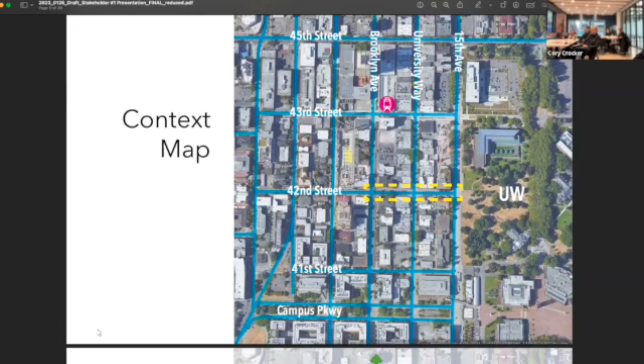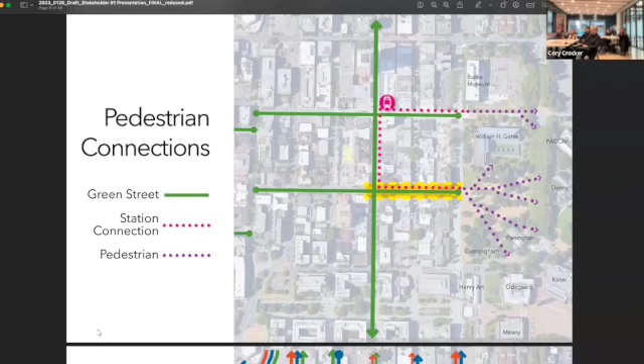This slide is highlighting the importance of this pedestrian connection to the Ave, or to the campus. This is the friendliest and nicest pedestrian connection off of 15th Ave getting onto UW campus, and we also have a close connection to the new light rail station.

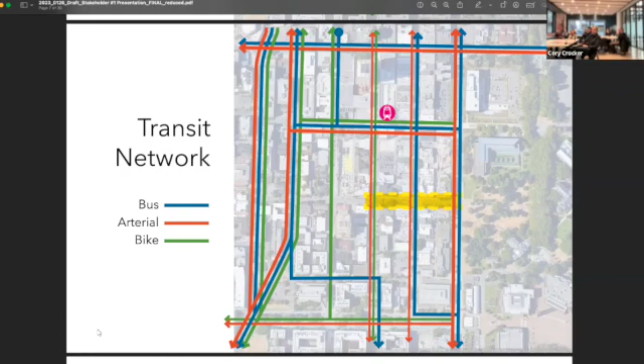This is looking at where buses, bikes, and cars are going. These red lines are the arterial streets, and this highlights that this is one of the few places in our neighborhood.

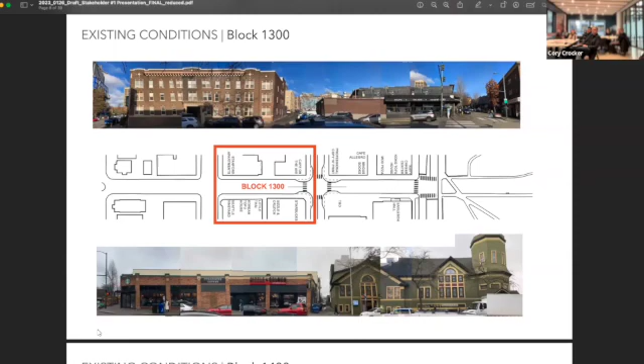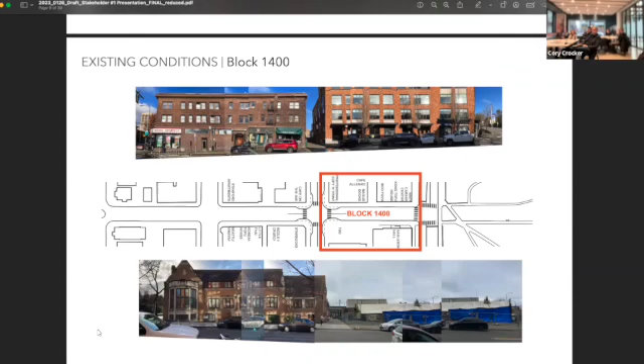This is the facade along 42nd Street. We're going to look at the 1300 block and then move on to the 1400 block. The thing I wanted to notice here is the variety of uses and buildings: residential, lots of ground floor retail, a church. Then on the next you'll see a new building, old historic buildings, and what will probably be a new building as well right here.

Empty lot. So now we're going to zoom in a little closer to the street and look at some of the conditions right on 42nd. This is just to highlight that it's currently a project looking to install curb bulbs right at the intersection of 42nd and the Ave. So just keep that in mind as we're thinking about what the future of this looks like.

Kevin used a little lingo there, curb bulb. So we're extending, you see the dash line on there, and that's what's on the drawing on your tables. By the way, the packets have the same information you're seeing, so you can cruise through there and recall something Kevin has shared with you. A bulb is, you're extending the curb to create a shorter crossing for pedestrians, calm traffic, creating a better pedestrian condition by calming the vehicles down.

This is being proposed by a project kitty corner to our project, the church that came down, and its new apartment building going up. Joshua knows a little bit about the history there. It's on the books right now, at about 90% design. It's our opportunity to inform that design, if we can even at least acknowledge that it's there and something to work with. That's what's shown on the drawing, so ask us at the table going forward. It's not a platform, they're just curb extensions, still a curb and gutter situation. That's a good example of something that could be tabled, and we can go through that later.

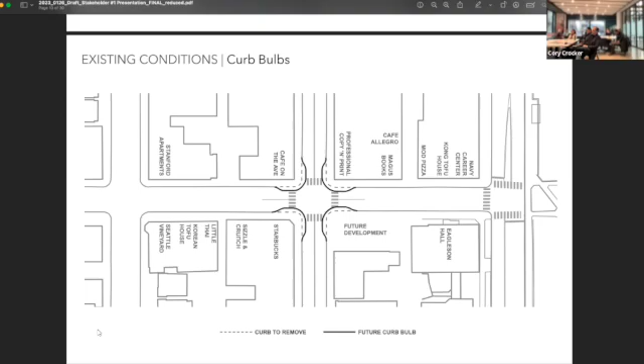This is looking at the buses and vehicles more on a granular level, highlighting the street but also that there's vehicular traffic in the alleys here. And then where are the buses? Buses here are coming down the Ave.

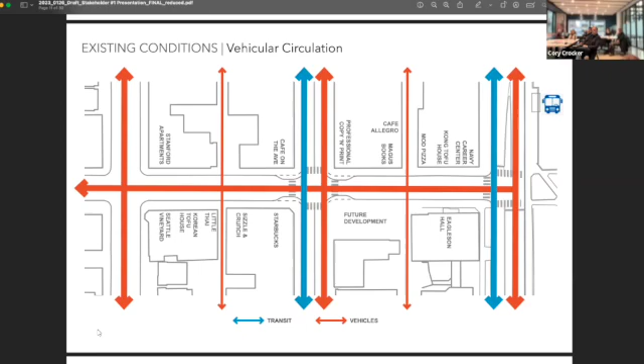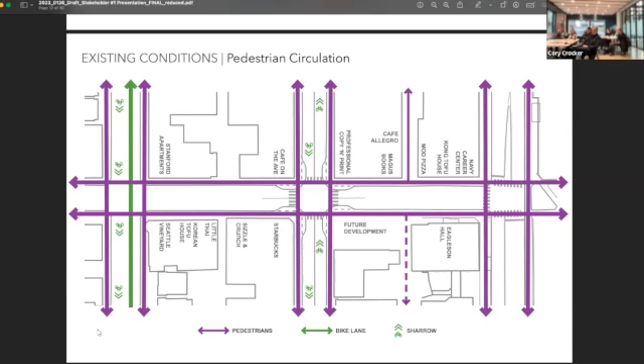We're looking at pedestrian and bike circulation. There's a lot of this east-west connection on the campus, but then also the Ave right here, and of course throughout the neighborhood.

So let's be very clear about what the needs are from a business owner, from the community, how it's balanced with other uses of the street. Just be conscious of that when we get into that conversation. Be very specific about it, don't globally say parking, because parking is a number of things. It's how we assign curb space, which Joshua would know a lot about. The city does, there's a full-time person that assigns curb space. So we can expect that to be a good conversation, a meaningful one today.

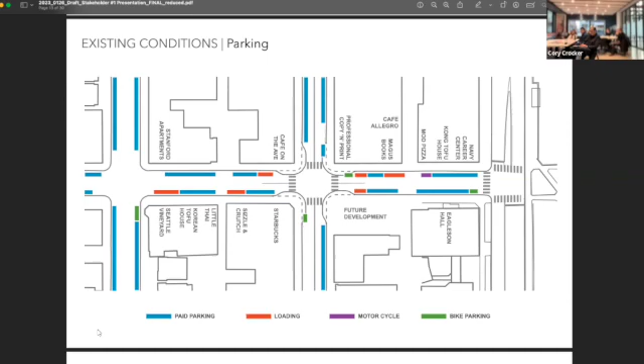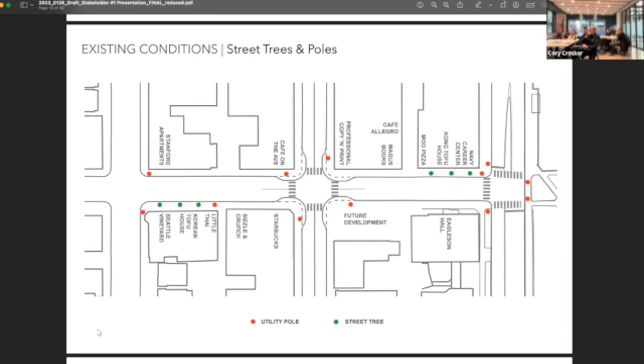And then this is some of that more permanent infrastructure that, as we get further along into thinking about what this street can be on a more physical level, we'll be paying attention to—the utility poles that are an important part of the street infrastructure, and also the street trees that are there. These are objects that we would work around.

This slide is showing, lot by lot, what is the maximum allowable development on a given lot in our area. These aren't going to happen immediately, and some of these heights will never be reached, because to reach the maximum heights there have to be certain conditions and allowances given. But these are what could happen on any given lot. For example, the currently empty lot there can have 65 feet, but some of the other ones can go higher. Generally what you see, the blue is up and down the Ave.

This is the rezone that happened with the incentive zoning overlays. It's something that Joshua and SDOT are looking at with respect to Green Street. So parallel to our project, they're looking at Green Street incentives, and we can potentially inform some of that too with our decisions and work directly with SDOT. So it's great to have Joshua here as well.

Katie: And just for context, isn't it 65 feet? It's like 10 feet per story, right? Ish—like 6 stories, more or less. So, right, lower along the Ave, higher outside. It's stepping, much like other neighborhood urban centers do in our city. And the new building that was built right here is clearly a 24-story building, so not every building will reach that maximum height, but this same zone at 240 is where those towers are going up right on Brooklyn right now.

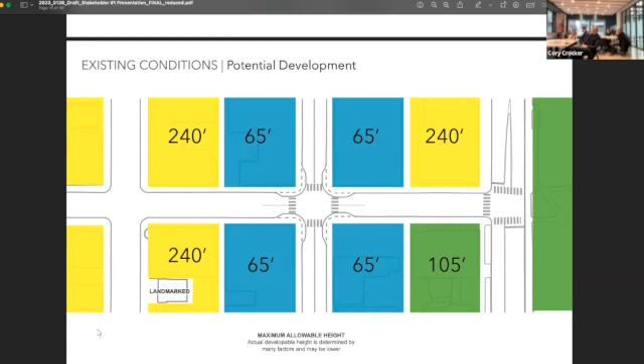This is one way to look at a street. We have our street plan down here, which is what's in front of you, and these lines represent the sections through the street, so we're looking at some different conditions. This is at Vineyard Church right here, and you see that we come across and there's that drop down to where Little Thai and Korean Tofu House and those places are. This is just looking at some of the different ways this street feels as you're walking down it—so we have that where there's the drop down.

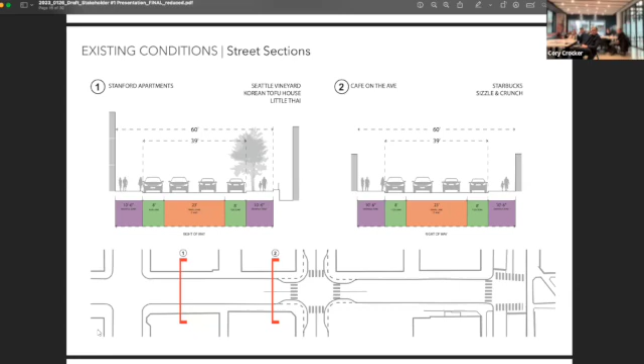We have more—this is by Starbucks and by Cafe on the Ave, where it's smaller buildings on both sides, right up against the sidewalk. Over here, this is by Magus and Professional Copy and Print, and then we have that currently empty lot on the side, and over here we have Eagleson Hall, which is set back a little bit more from the street with some trees between it and the sidewalk.

So we are fortunate to have a fairly recent update with our standards and streets—I think in 2019 SDOT adopted their Streets Illustrated, a remake of their standards. It's pretty significant, and one of the things it allows for is a curbless street. There's a couple of typologies on the screen. It's a big advancement that allows SDOT, from a standards perspective right out of the gate, to do something very pedestrian focused while still allowing meaningful vehicular traffic through. So we're very fortunate to have this to work from as a basis.

And we'll be going back to that because I think there's a lot of potential. It may not be curbless in the end—it could be a different type of curb structure—but again, there's a pedestrian focus on streets.

Another thing I'll say about our street: a 60-foot, 66-foot dimension is very common in our city, especially in a commercial district. So when you go and look at other neighborhoods of similar scale in comparison—I live in Ballard, and there are streets in Ballard very much like this—but in West Seattle, Columbia City, around the city, there are similar streets, likely of this dimension. So that's a good comparison as you go and experience the city and see something you like, and bring it back to the group. Next slide.

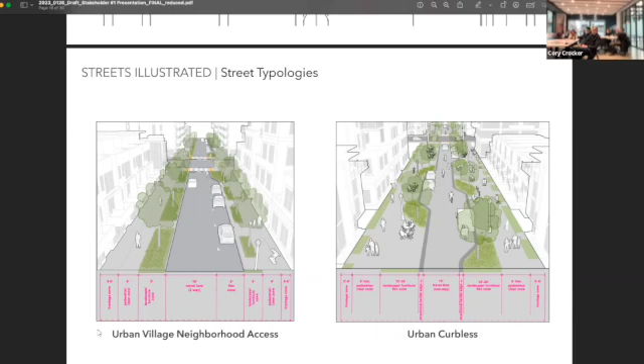This is an important one. We want to dream today and think about program. This is an SDOT right of way, and it does have standards—we have to be careful about what I'll call deviating. Deviate is an important term in SDOT. Once you deviate, you go in front of a deviation committee and fight for something like alternative surfacing, a different light standard, or potentially custom furnishing. These are non-standard things, so we have to be careful and pick our battles.

We are fortunate to have a good connection with SDOT. Joshua is going to join us with all the stakeholder meetings. We have direct connections to all the departments within—urban design, urban forestry, street use, street operations. All these departments are really important, and we'll inform you when we think we're getting a little too far off base. We don't want you to stop dreaming, we want to think big, but we have to think about where we want to put our effort to make the street the best it possibly can be.

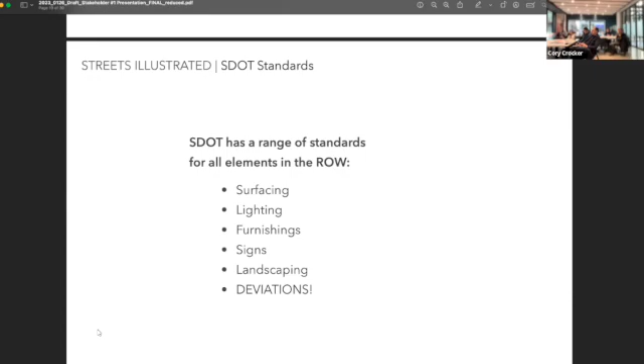The next point is important, and it's relative to what you've seen happen on 43rd. 43rd is a little unique in that it was an SDOT project but also had input from SPU from a maintenance standpoint. SDOT has very limited maintenance capability beyond the standard stuff you see in the street. Most of the time a tree, the landscape, furnishings—they're actually maintained by the frontage owner, and that's the way SDOT likes it. They don't like to be in the maintenance game, and they don't have budget for it.

I'm told they're working on that, similar to our Parks Department, which has an annual maintenance fund through a levy we voted on several years ago, where a park district gets funded annually. SDOT was potentially working on something similar too, but we don't have that right now. So it's really important for us to think about who's maintaining this.

It may be that if we come up with a non-standard solution, we use somebody like UDP to be the sponsor. So this is something we have to think about long term. What happened on 43rd was things didn't get maintained, and then they came in and maintained it all at once. We want to avoid something like that—we want to be active in the maintenance. Now we spend $600 a month to maintain it.

Yeah, so UDP—there you go, that's a great example. We have to think about long-term care, and it's not uncommon to have a community partnership with these spaces. You find them around the city, where the frontage owners, or a group, an alliance, or a UDP takes the lead on that. But it's money that's not going to the normal work we do, so it wasn't really set up that way—we're just grabbing it for now. I think we need a bigger conversation about how that works.

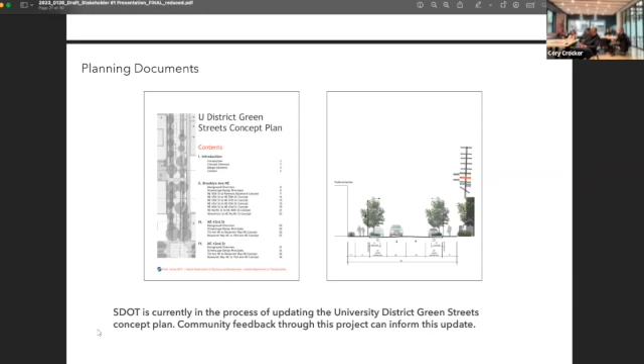So it's our opportunity to actually inform that—details like setbacks, surfacing, furnishings, amenities you'd like to see on the frontage of a particular parcel. This is an excellent opportunity, and Joshua is along for the ride as we continue to partner with SDOT on this.

All right, so now we're going to quickly go through some precedent imagery—these will be in your packets as we're talking—from other streets that have done alternate versions that are more pedestrian focused. I'm just going to flash some of these images and talk about some of the things I'm seeing in them, but they're also for reference as you continue the conversation.

So these are some images from streets in Seattle that have done transformations. We have 43rd Street over here, Bell Street downtown in Belltown, and this is by the Capitol Hill light rail station where there's the Broadway Farmers Market.

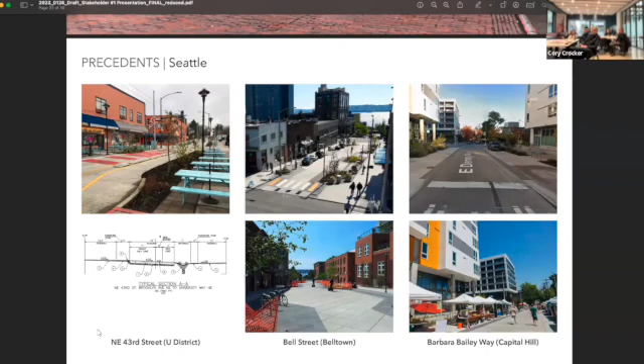Some of the things I'm seeing here is they've gotten rid of the curbs. There's opportunities for festival events, farmers markets. And except on 43rd, I'm seeing parking on these two streets when there isn't a festival going on.

These are some other projects in Seattle. We have 14th Avenue Northwest in Ballard. This one pushed the main arterials to one side of this large street section, and then has more of a park and stormwater infrastructure on one side.

We have Pike Place Market, the most famous one in Seattle and the longest lasting, which has an interesting mix of people and cars and businesses.

This is Occidental Avenue down in Pioneer Square, which is open to, I think, just deliveries. Well, it's open to vehicular parking during the day. Short-term parking that happens, believe it or not.

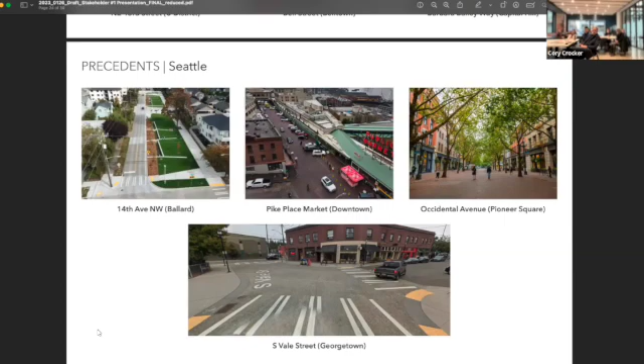Yeah, in one block. And then this is in Georgetown, where there's a table where they've gotten rid of the curbs just at this kind of complex intersection, and it allows this neighborhood to block this off during certain festival events and use this as a friendly pedestrian space with access to these businesses during those moments, and otherwise it just changes the crossing patterns, but vehicles are still driving through.

A couple more from Seattle. These are down in South Lake Union. What I want to highlight here is that again, they kept the street going through, but this one jogs the street, so it has a different feel as you drive through, and cars are slowing down, and there's some parking on the sides of that one.

And then this one has created a much bigger pedestrian space on the north side where it's sunnier, and has pushed the cars over toward the south side of the street.

And that's Thomas Street, and it was used, I think, in the RFQ for this project. It's one that we've been working on, and it's due to be constructed here, maybe this quarter, maybe starting next quarter, and it favors one side of the street. But it was a way to pedestrianize something that still allowed vehicular traffic. It removed parking in this particular instance in coordination with adjacent business owners.

So it's a lead up into Seattle Center, from 6th Avenue up to 5th Avenue and into the center. So it's really an extension of Seattle Center. That's the way we think of it. Not unlike we might think about the extension here, but historically, Corey was saying about extension of campus to transportation as we framed it here.

But one question, the 18-foot, I thought we needed 20 per emergency vehicle. That's negotiable.

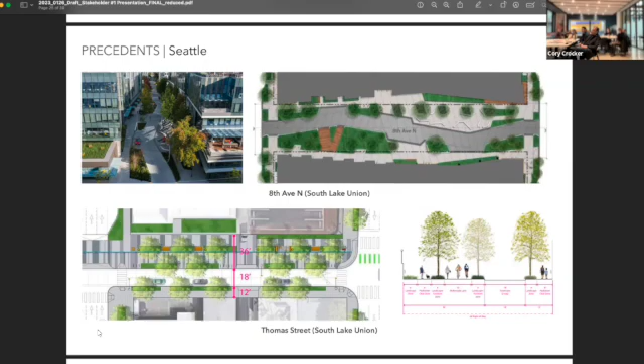Oh, okay. Yeah, so I go back to Bell. If you go back to Bell Street, it's actually 17 feet. Bell Street's a little bit unique in that it's actually owned by Seattle Parks between the avenues. So it has a little bit, but still, the fire department, the fire chief will dictate.

And a lot of it has to do with being able to get in there, put out an outrigger, equipment, relative to parking, no parking. We have no parking on Thomas, so that alleviated that pressure. So there's a negotiation. You're going to end up somewhere between 16, 17 feet and 20 feet.

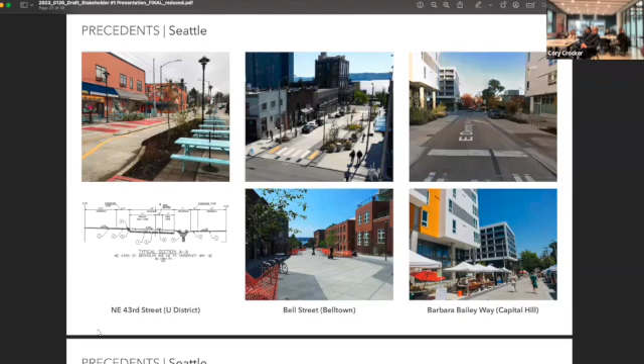They always start at 20 feet and you negotiate down. So there's room for negotiation. And there's standards, I'll say, just end on the standards. The new Streets Illustrated allow for 9-foot lanes. So there's a basis of going to 18 feet.

Just a quick question, is Bell Street one way, and like this new South Lake Union one? At the top, are both of those one way? It gets a little complicated. So the South Lake Union one, I think, I'm not sure if it's one way, quite honestly. I think it's two way. It's a yield street, which is our most common street in the city, mainly in residential.

There's a thing called a healthy street, which Bell Street is applying. And I think it's a healthy street that allows for, you're supposed to restrict vehicle access. It says so. It's really business and delivery, but it allows for bikes to go two-way. It's a fairly complicated story, a background to it, but it has to do with the street type that is legislated.

So it's a whole other conversation. And then the other one that's not built yet, the 18-foot wide one, is that one way? It's two way, two single lanes. Okay, yeah, but something's more one way street, so it's a good point.

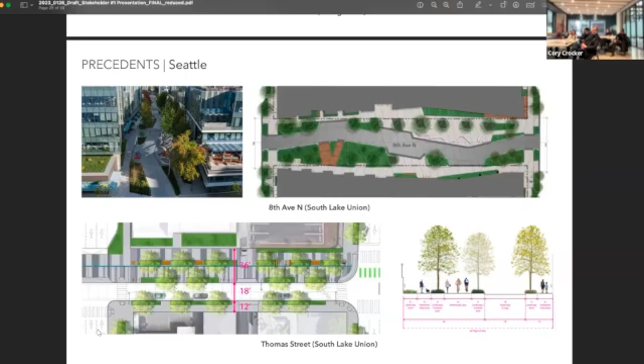These are some streets elsewhere in the world, some close by, some in different countries. There's something in Kirkland combining retail, parking and pedestrianization, and we see a lot of different surfacings in these international examples. There's a lot of open space, especially where emergency and other vehicles can go through, but it's very pedestrianized in some of those examples.

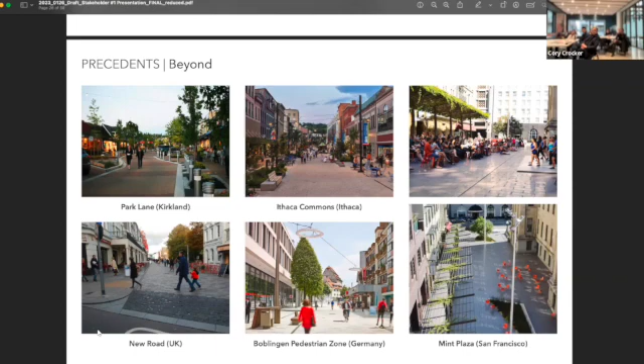Okay, I didn't stick to 3 minutes, I think I took my whole 15. Apologies. So should we take a break, or just keep going? Let's just keep going, and we can maybe answer some general questions.

The idea is we can break into groups, and you've got questions on the paper in front of you, but we'll go through some guiding principles first. On the table there's a set of questions. The whole idea is getting this down, writing on paper or drawing things, getting ideas, talking about program types and uses for the street. That's what today is about. We take that away and come back with several concepts for our next stakeholder meeting.

Yes, you can say anything about a public art program. Is that possible? What are the values of that? And what set the 2 block boundaries, or how did that come about?

Maybe go back to the plan. Corey, I'll give you the second question first, maybe.

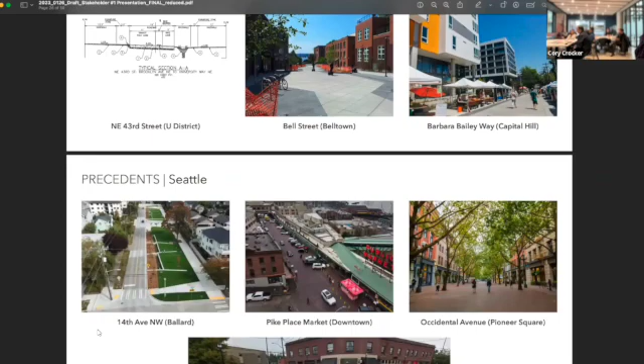Sure, the second question. This is a Department of Neighborhoods grant, actually fund, so we wanted to focus on a small area, knowing it can grow from there. We're looking to tie infrastructure to the dead end on campus, and we can extend easily to the west. We also had a good need right here because 43rd Street's already done and designated a green street. We could have looked at a bigger scope, but wanted something more manageable. If we can set the tone with this one little choke point, we can try to extend that later on.

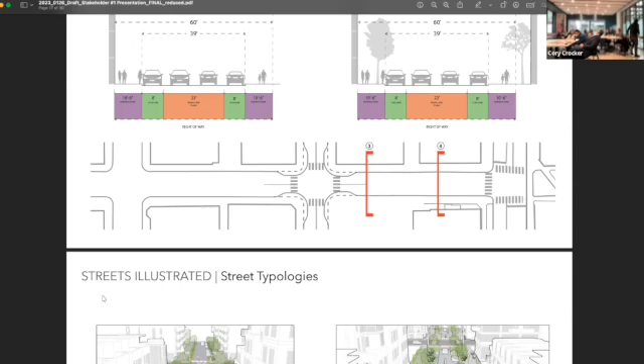Just to rephrase that, conceptually the idea is it spreads further, that's part of the change. And you want to do the streets - can you go back to the bigger view? Yep, bigger. That's right, Mark.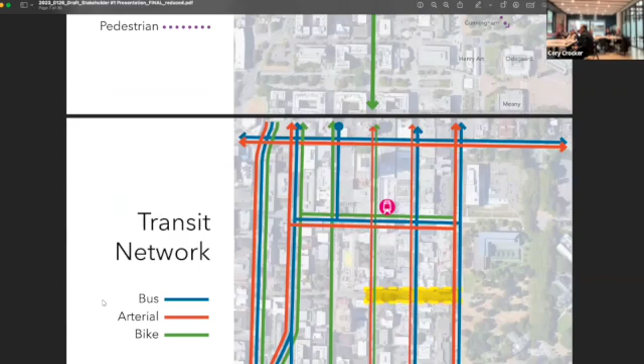I think critical to the Community Partnership Fund through Department of Neighborhoods is bite-sized chunks, manageable, so you know it's going to get done. That's really critical to being awarded, and I think that was a smart move by the group. Bigger aspirations are to get all the way to Roosevelt and really make these connections. We have Green Street north-south with Brooklyn, that's a critical one as well. So that was a nice bookend, I think.

If I can interject here - we've done things in the past, like the U District station area mobility plan, all community driven, the update to the parks plan, the alley activation plan, but these plans sit on the shelf and we're trying to activate on them. This project is different - we're trying to get to a very targeted 10% design, because with that document at the end of this process, we can hand it to SDOT and the city, OPCD, and say here's something the community thinks would be a really good project. Then they can take that document and start looking for funding to try to leverage it and make it happen.

So this whole project is to try to start implementing the ideas we drive. We were remiss in just saying the goal is 10% design here. That's a concept, and that's what you saw with Thomas Street on the screen. It's now at 100% design that SDOT managed, and we were designing part of that design.

We were the designer, they were the engineers and lead. So there's a similar path here potentially for this project. First step, 10%, let's get it funded, get it into the SDOT funding cycle or otherwise, and then continue the path with 30, 60, 90, and 100% build it. And it will inform the Green Street update, which will also dictate how this Green Street network works in our neighborhood, and that's still coming together.

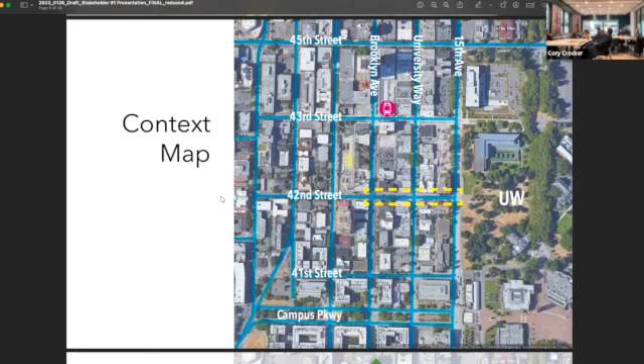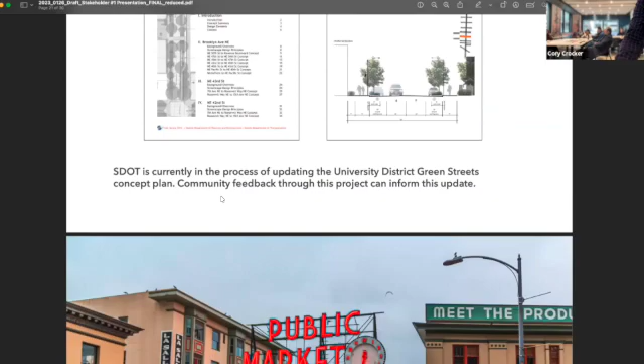So we should move on to our most important part of today, which is us telling each other what we want to have happen in the street. I'm just going to go over what the guiding principles are real fast. That comes from the steering committee. I'm not going to read them verbatim, but they're on your papers here.

One of them says that we're going to create places for people centered on the pedestrian experience. The next one is to provide for the needs of local stakeholders and businesses. The street is going to provide for those needs. Enhancing the connection between campus and the community, the neighborhood. And embracing best design practices. So those are the big principles that can inform our conversation.

But then the questions are - I'm going to let each group go over the questions. Basically, it's like, what do we want the street to do? How is it going to provide for each of these things? In our groups, we have the packets, you have the questions, and you have this tabletop with the map. There's going to be a facilitator in each group to help the conversation go, and we're going to be going through the questions. And if more ideas come up, we'll be writing those down and keeping those as well.

The goal is to get what everyone is hoping for this street to do. Next month, we'll come back with some drawings that are going to try to provide for all of those needs that everyone's wanting the street to provide. We've got about 30 minutes because we want to allow for some report back at the end. And we've got Robin here too, our civil engineer, who can float around for any more technical questions.